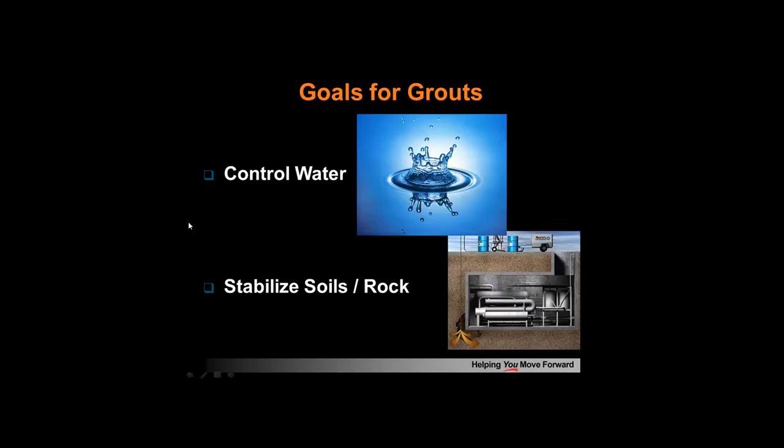Thank you, Don. I'd like to start with talking about what the goals are for grouting, and they basically fall into two particular arenas. One is to control the inflow of groundwater, and the second is to stabilize soils and rock. And how we do that is through the use of various types of grouts.

There's three predominant types that fall within that category. The first are particulate grouts, or what we all know as cement grouts. Within that family, we have ordinary Portland cement and ultrafine cement, which is a cementitious type grout. Then we fall into the solution grouts family, or better known as the chemical grouts, with urethanes as well as acrylics and silicates. And bitumen is a hot tar type grout that's used for stopping large inflows.

Definitely worth mentioning, it's a case-by-case basis and very specific use in those situations. I'm predominantly going to talk about, though, the particulate grouts and the solution grouts in this portion of the presentation.

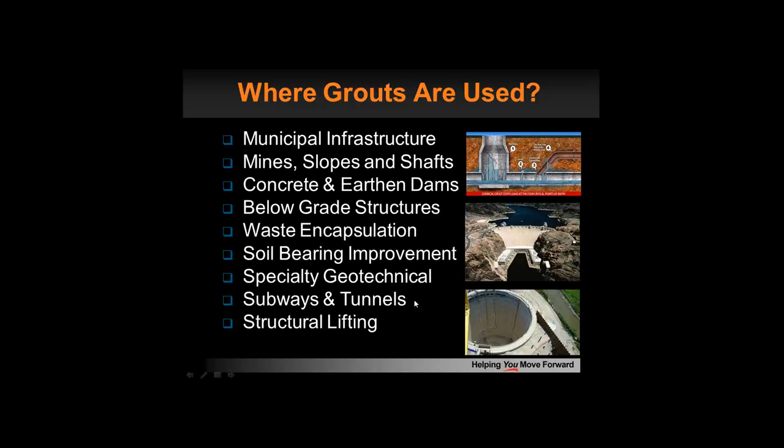Where are grouts used? Well, municipal infrastructure is definitely a strong application for grouts, as well as all these listed here: mines, slopes and shafts, concrete and earthen dams, below-grade structures, waste encapsulation, soil-bearing improvement, specialty geotech, subways and tunnels, and structural lifting. I'd like to begin talking about the cementitious grouts mentioned just a second ago.

What are the differences between a Portland cement and that of a cementitious grout or an ultrafine or a microfine? Portland cement, on average, has 15 to 20 micron size particulates within that mix or grout, whereas in the cementitious grouts, a microfine has an average of 8 micron particulates, and the particulates in the ultrafine is an average of 3 microns.

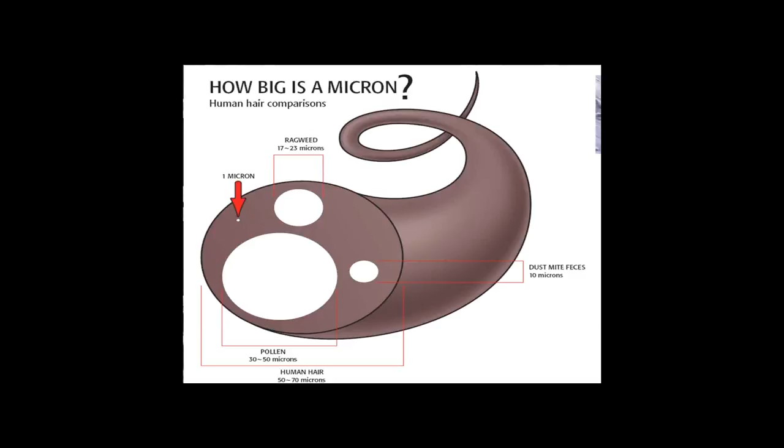What makes up a cementitious grout? It's two components: Portland cement and a pozzolan. There are additional additives for each particular mix design. Super plasticizer, or water reducer, is another common addition used to help with fluidity. But the pozzolans play a key role, and there are two predominant types used.

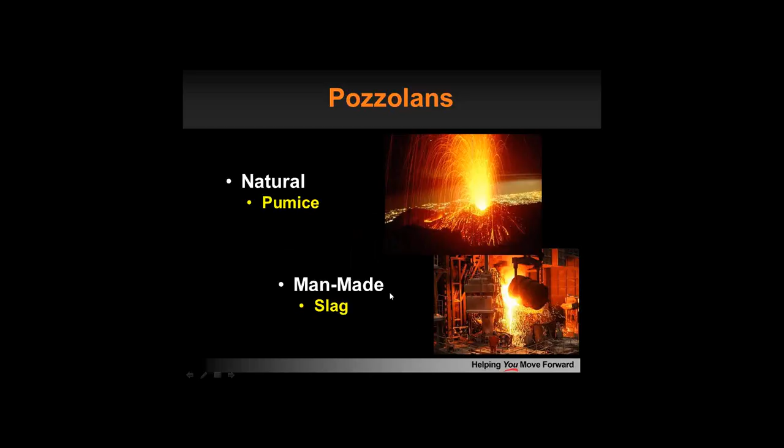There's a naturally occurring pozzolan called pumice, which is used in a lot of ultrafine cements, and there's also a man-made pozzolan called slag. Slag is a byproduct of the steel process, while pumice is a byproduct of volcanic activity. Pumice is definitely a long-lasting pozzolan.

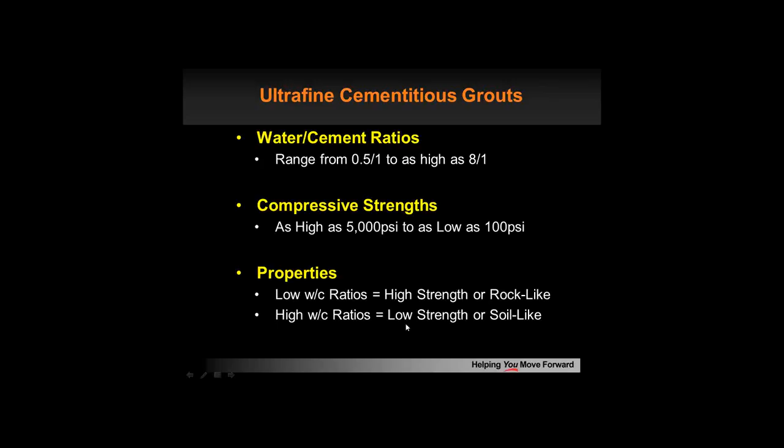Some of the value adds for ultrafine cements: you have a variety of water-cement ratios, from as low as 0.5 to 1, up to as high as 8 to 1 in some parts of the country. Compressive strengths can range as high as 5,000 psi to as low as 100 psi. A low water-cement ratio gives a high strength or rock-like finished grout, whereas a high water-cement ratio gives a low strength or soil-like grout.

Moving on to the types of chemical grouts, two predominant families used throughout the industry are polyurethane and chemically activated grouts. Within the polyurethane family, we have hydrophilic foams and hydrophobic foams.

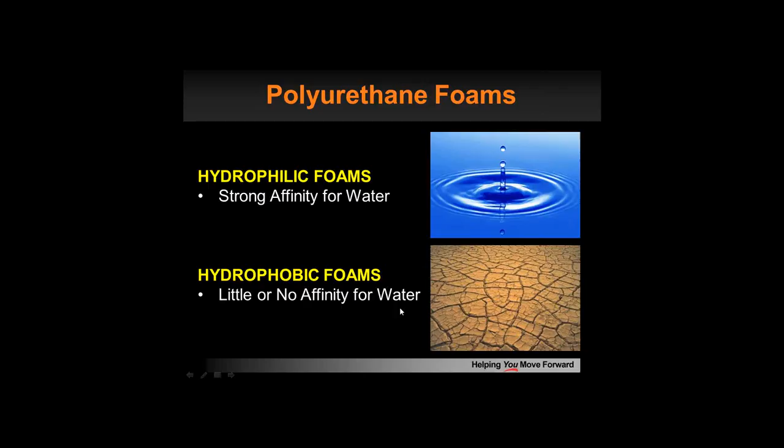The hydrophilic foams have a strong affinity for water — they like to be in a water environment. Whereas the hydrophobic foams have little or no affinity to water, and they can withstand the wet-dry cycles that may occur on projects.

Typical urethane foams have a wide range of viscosities, as low as 50 centipoise to as high as 3,000 centipoise. Reaction times can vary from a few seconds up to 30 to 45 seconds, and sometimes a couple of minutes. They can also be sensitive to temperature.

They have a wide range of varying expansion rates depending on the product you might use, as low as 400% and as high as 2,000%.

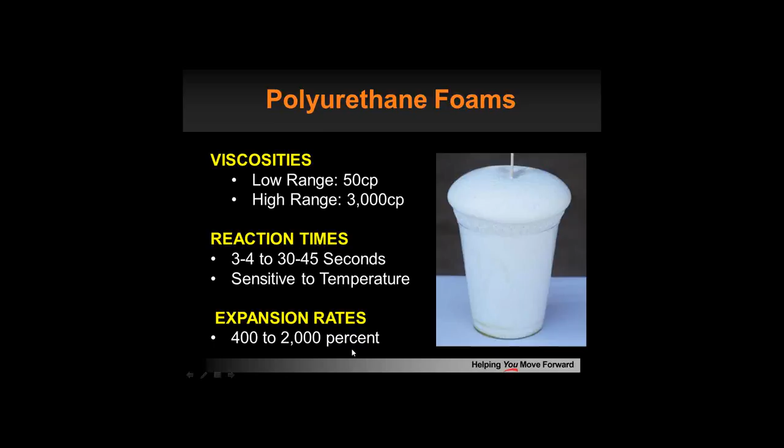Some of the value adds of polyurethane foams: single and dual component options, cures that can be accelerated, varying expansion rates of 400 to 2,000%. A lot are very chemically resistant, and there are several options in the marketplace for potable water certified products.

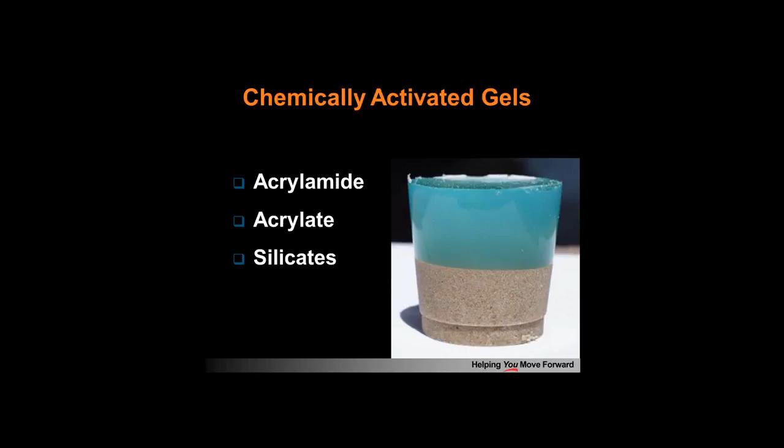Moving on to chemically activated gels. Within that family are acrylamides, acrylates, and silicates. Chemically activated gels are water-based, making them hydrophilic — they like water in nature. They often have ultra-low viscosities with the ability to penetrate very fine cracks in soils.

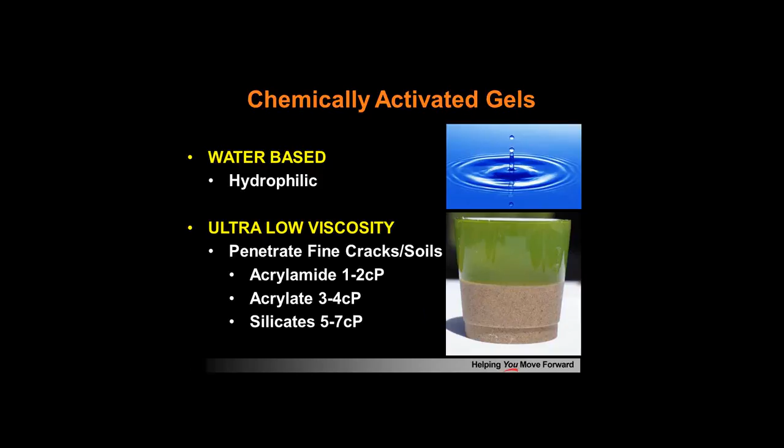Acrylamide has a viscosity of 1 to 2 centipoise, acrylates is 3 to 4 centipoise, and silicates is 5 to 7 centipoise.

Some of the value adds for chemically activated gels: lifespan — acrylamide up to 362 years, acrylates 54 years, and silicates considered a temporary solution on most applications at 1 to 2 years. Chemically activated gels are chemically resistant and have controllable set times, with acrylamides and acrylates ranging from a few seconds up to 10 hours, and sodium silicates about an hour.

There are root control additives used in the municipal industry that can give you 2 to 3 years of inhibition. Now moving on to municipal grouting.

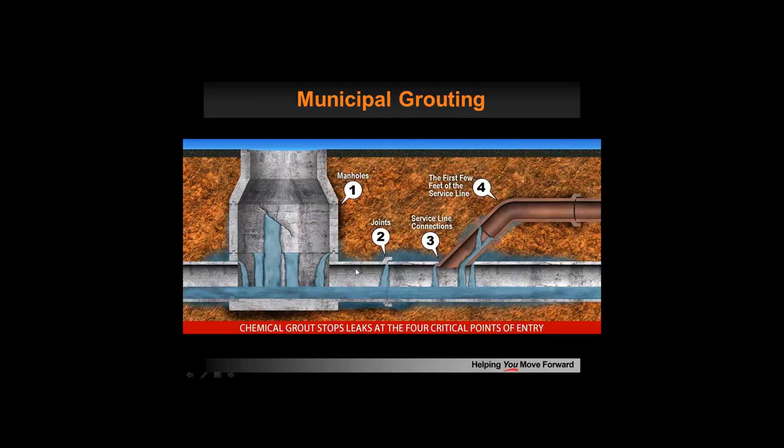Municipal grouting is a key solution in controlling infiltration in the different infrastructure of a sanitary sewer system within a municipality. That sanitary sewer system will consist of a main line, laterals, and manholes. Each of these — whether joints or cracks in the main line, the connection points between the main line and lateral, or the same joints and cracks in manholes — can serve as potential infiltration points. So how do we solve this with grouting?

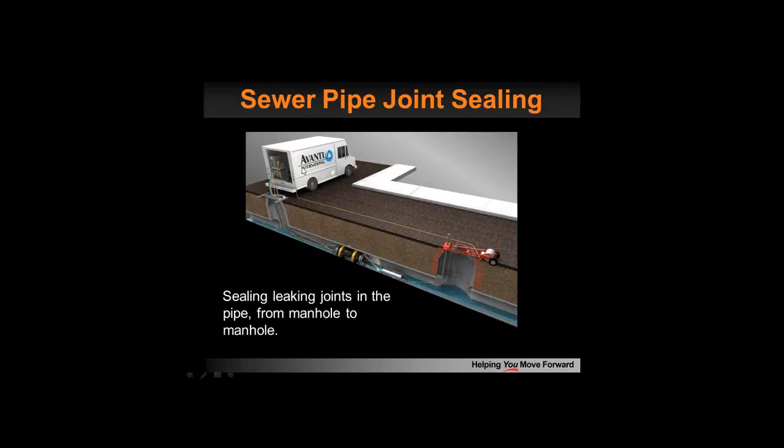Sewer pipe joint sealing or grouting can be done with a truck and a packer. They'll straddle that joint and pump grout in and around it, creating a bulb outside of the joint. Here's an example of an excavated grout ring that was injected around a sanitary sewer pipe.

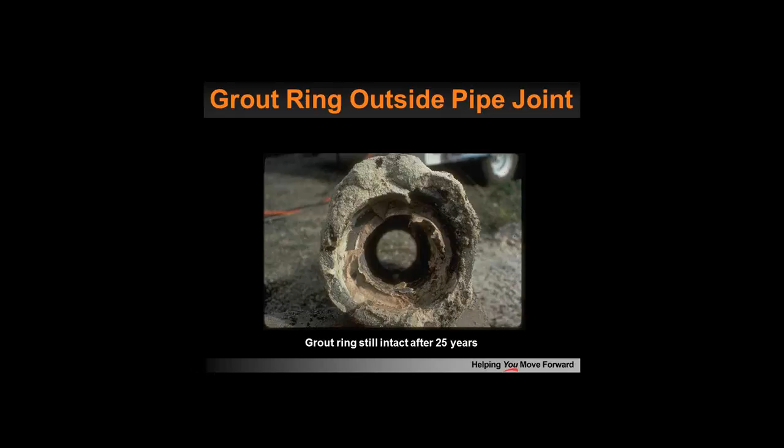So it creates a soil gel matrix, which is watertight. Again, pipeliners don't stop infiltration. That's another point of potential inflow or infiltration of the sanitary sewer mains.

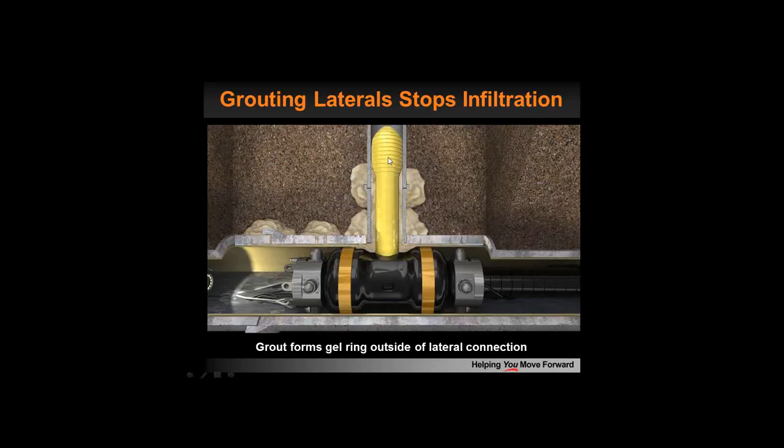Again, that solution is grouting. They'll have a packer with a bladder that can stand up into that lateral, and then the ability to inject a grout into all of those inflow or infiltration points. Manholes, again, curtain grouting of manholes are key, or crack injection for controlling water inflows and infiltration.

Frequently done with chemical grouts. In this particular situation, urethanes oftentimes are used, whereas in sanitary sewer mains and laterals, acrylics are used most often.

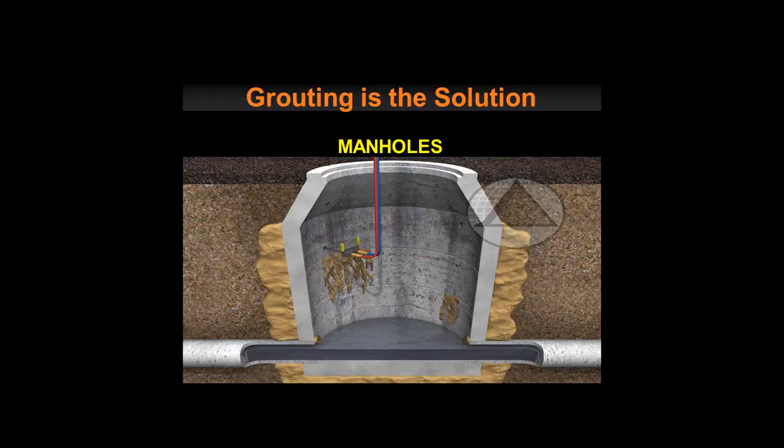Grouting is truly a cost-effective solution. Quick example of pipe rehabilitation on 8-inch pipe. Pipe grouting runs roughly $6 to $9 per lineal foot in cost, whereas pipe lining of that equivalent diameter can be as high as $25 to $35 per foot.

Lateral rehabilitation connection grouting could be as high as $300 to $350 per connection, but that's minimal in comparison to what it would cost to replace that connection or do other means of repair or rehabilitation, ranging as high as $1,500 to $7,000 each.

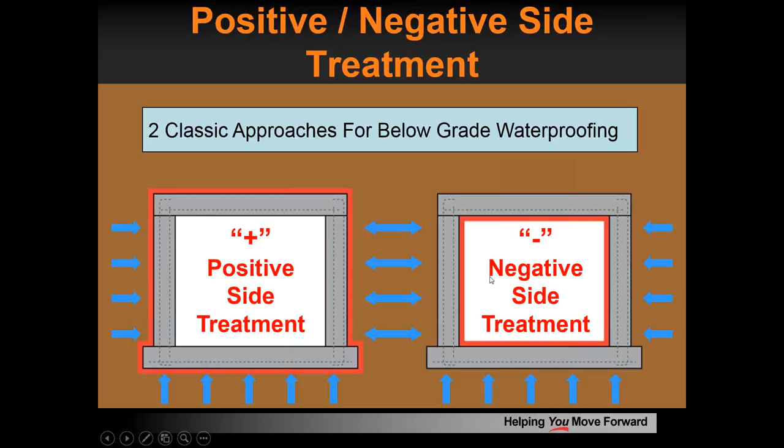On the other side of the screen, on the right-hand side, a typical solution when a structure may have had a positive membrane and has started to leak, or sometimes even in new construction, we use negative side treatments. Negative side treatment means that the membrane system or treatment is opposite the hydrostatic water. So these are the two classic ways we do water control, positive and negative side treatments.

Now, when we get into negative side systems, there are basically four classic techniques used today. The first one and the most common is injection grouting, seen on the upper left. Then there's a concept called water management, which basically means you allow water to leak into the structure. You put a plastic membrane over the floor and wall, cover that with concrete or steel studs and gypsum, and then you direct that water to a sump and it's pumped back out.

So in some respects you might think, well, that doesn't seem like waterproofing. Well, that's why we call it water management. And many times in water management, the first thing we do is injection grouting before we do the water management technique. Then there's coatings.

Coatings typically are techniques where you put some type of chemically reactive or sometimes elastomeric coating on the inside of the structure to seal out the water. Normally in coatings, we first inject all the active leaking cracks and joints.

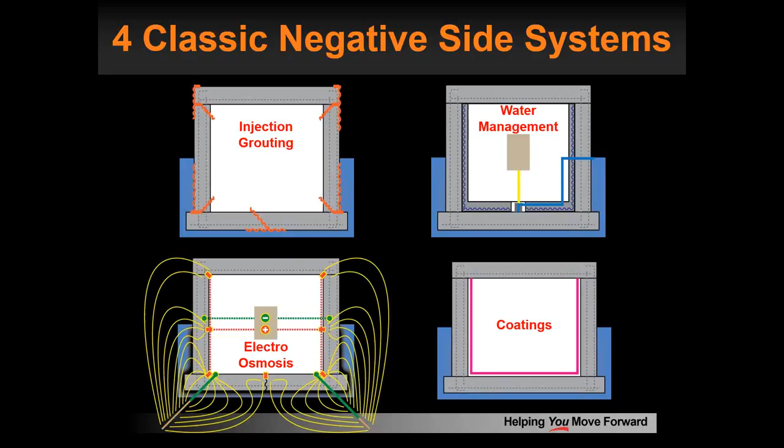The last technique used on occasion is called electroosmosis. This is basically an electrical solution, whereas what we do, shown in red here, is put small anodes in the cracks and joints on the inside face of the concrete, and then we put cathodes, rods that are drilled through the floor or wall out into the soil about 10 feet, and connect those to a power supply. So we have this power supply providing positive charge on the inside of the concrete, negative charge out in the soil, and we create a very low-level electric field, moving particles from the anode to the cathode, and in thus doing, we dry the concrete out.

Crack injection is probably at the next level, a fairly low-cost investment. Performance sometimes can be a little irregular depending on how tight the cracks are and how old the concrete is. And then we have interior coatings, usually a little higher performance, but typically with interior coatings, you first have to do crack injection, and that's why it tends to be a bit more expensive.

Then there's drainage. Typically, first we do crack injection of all the leaking cracks and joints, and then we put in plastic membranes, a sump system, and cover up that drainage media. And then there's electroosmotic pulse technology, which is a bit more expensive.

Of course, the final solution is exterior membranes, which requires digging up the structure and re-waterproofing it. That's actually always one of the best solutions if it's readily accessible. Many times, though, the outside membrane is not accessible, and we have to do crack filling, crack injection, interior coatings, drainage, or electroosmotic pulse technology.

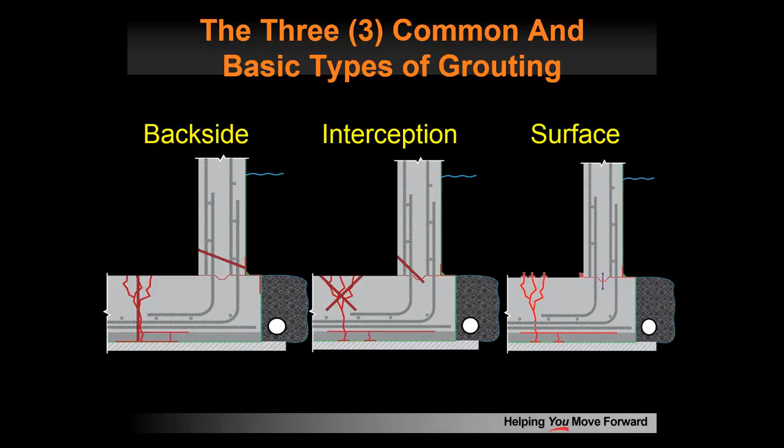Now we're going to focus on the injection techniques today since we only have a few minutes. There are basically three different types of injection: surface-mounted injection, backside grouting where you drill through the floor and wall, and the most common one, interception grouting, where you intercept the wall or wall-floor joint at about the center third, or intercept cracks and leakage in the floor at the center third of the slab. We're going to talk briefly about all three.

One thing you need to understand is that when you inject grout into a crack or joint in concrete to make it monolithic, many times these cracked sidewalls are contaminated with clays, silts, carbonates, and a whole variety of materials. So if you have a structure that's been leaking for a long time, the cracked sidewalls may be contaminated, and anything you inject there is really not going to bond that well. It'll give you some fairly immediate surface sealing, but with time, if the cracked sidewalls are contaminated, it's not going to be a 100% solution.

Another thing that's very important, which we'll talk about a little later, is the pH of the liquid in the crack. There are many types of grouts that are not very resistant to super high pH environments, such as urethane technologies. In conditions with very high pH environments, typically we're looking at acrylamides and acrylates. Sometimes corrosion of steel byproducts are in the crack, which can be difficult, and sometimes there are shadows—little voids that run behind or under the steel—where water can migrate as well.

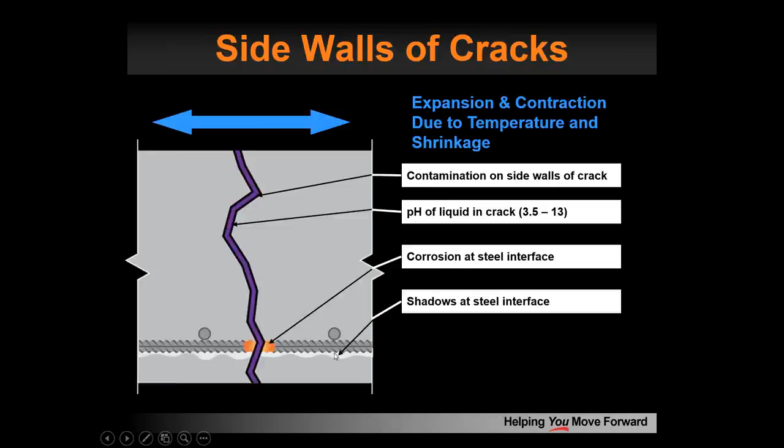So let's look at surface-mounted injection. Typically it's a low-pressure technique where we put ports on the surface and use epoxy or a two-part urethane, pushing that grout back through the crack to try and make the concrete monolithic.

Here's an example of that. This is an industrial wastewater treatment tank where we did surface-mounted ports, then pumped a two-part urethane injection grout into all of the cracks to create a seal.

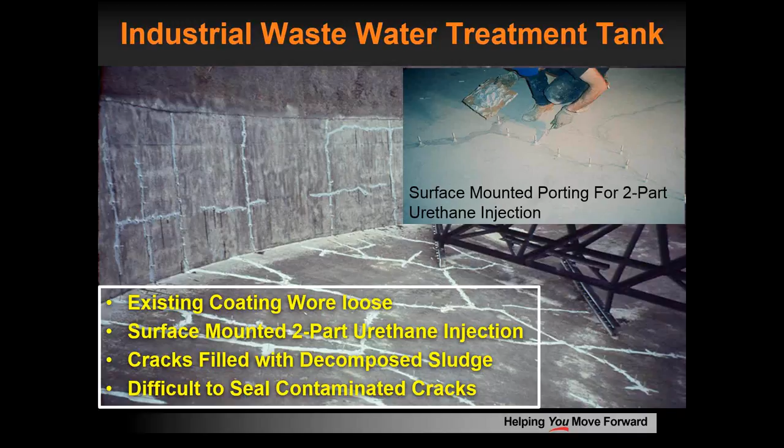At the bottom there, I note it's difficult to seal contaminated cracks. Many times in these wastewater tanks, there's a lot of sludge and debris in the cracks, so you don't always get 100% seals. Normally, if you can get 90% or better, you're doing pretty good.

Interception grouting is probably the most common technique, where you drill into the center third of the wall or the center third of the floor. Typically, we're injecting under pressures of about 100 to 3,000 psi. Normally we don't like to inject grout into concrete over about 400 or 500 psi, because you're exceeding the tensile strength of the concrete. That means using grouts with very low viscosities, as Britt talked about, is very important.

In interception grouting, we typically inject hydrophilic urethanes, hydrophobic urethanes, acrylamides, polyacrylates, and occasionally microfine cement. Essentially, we're intercepting the center third of the concrete, grouting the entire crack or joint, and trying to make that concrete monolithic again.

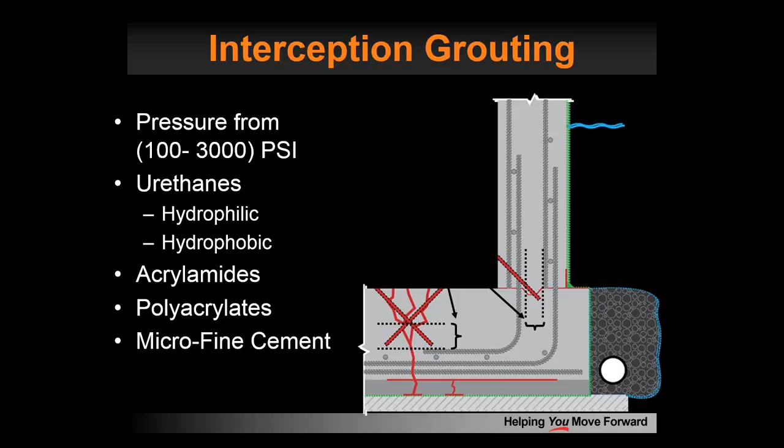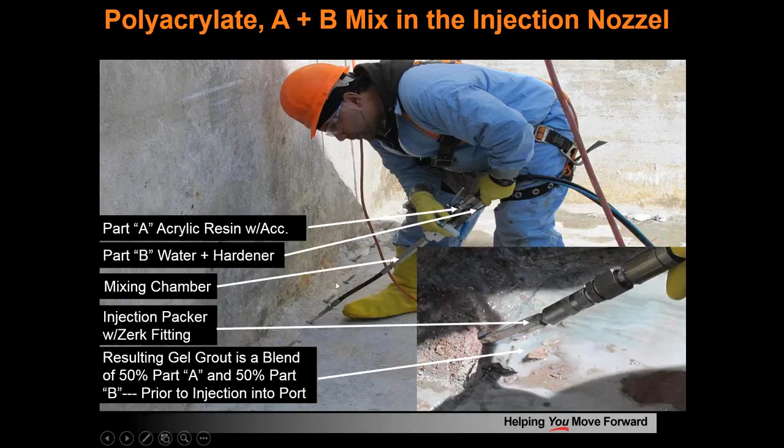So this is actually a two-component grout. If you look closely, you'll see a blue line and a black line, hoses going to the mixing head. We have an acrylic resin with accelerator as part A, and water with a hardener as part B. These are pumped 50-50, mixed in this mixing nozzle, and then shot into the joint.

The next example I want to show uses acrylamide, in a meat production facility. The architect designed this with the processing area on the upper level and storage of products on the lower level. One of the things that was done is they value-engineered the waterproofing membrane out of this intermediate floor when they built the structure.

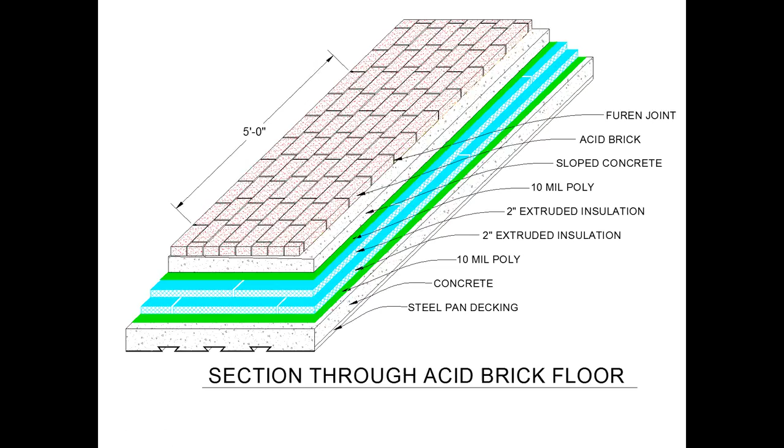Of course, water was leaking from the process area down onto finished goods. The FDA inspector shut down the facility and told them they had to correct this. They looked at removing the acid brick floor and the entire composite, which was about $126 a square foot, and it was going to shut the facility down for several months.

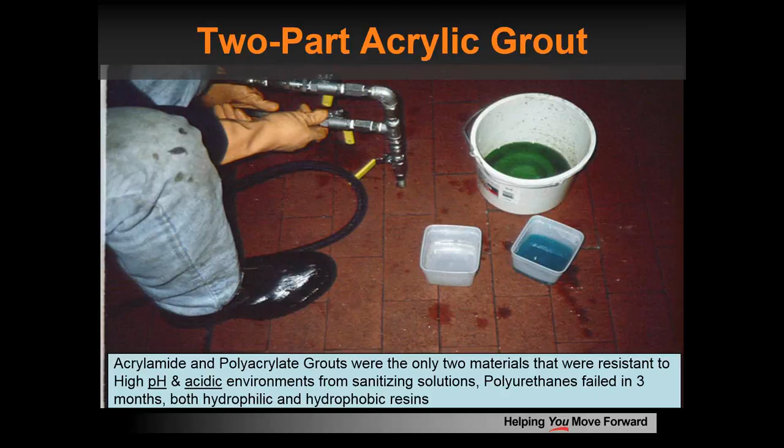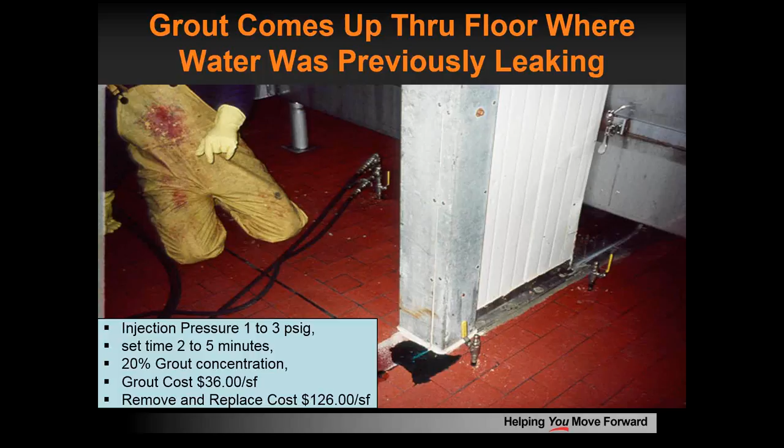Here you can see we pumped at about 1 to 3 psi, with set times of 2 to 5 minutes, a 20% grout concentration, and this grouting cost about $36 a square foot. To remove and replace the floor and structure would have cost $126 a square foot. So it was a very cost-effective solution.

They looked at tearing this entire thing apart and redoing it. We decided to use hydrophobic grout at 20 parts urethane to 1 part water, a twin stream application, and basically used a rigid foam grout to seal all the void space within the structure.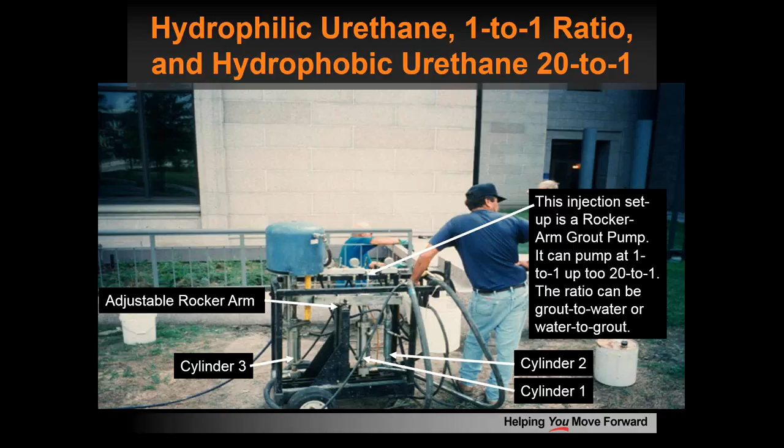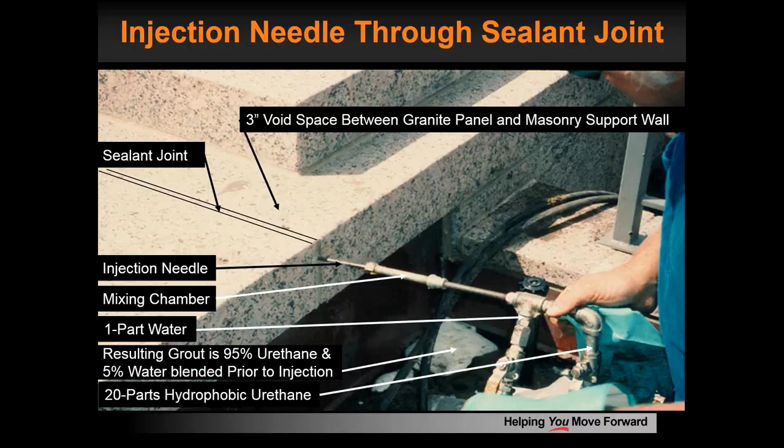Here's a better example of how we put a stainless steel needle on the end of our grout line. We have a mixing chamber, with water coming in as 1 part and 20 parts urethane, giving us a matrix that's about 95% urethane, 5% water, mixing before they actually get into the structure. That way we have good mixing capability of the urethane with water. So that's another good example of injection grouting.

Now I'm going to talk briefly about backside grouting. This is where you typically drill completely through the structure and pump grout curtains, if you will, behind the wall or behind the slab. Basically we're solidifying the soil and creating a curtain behind the wall or floor.

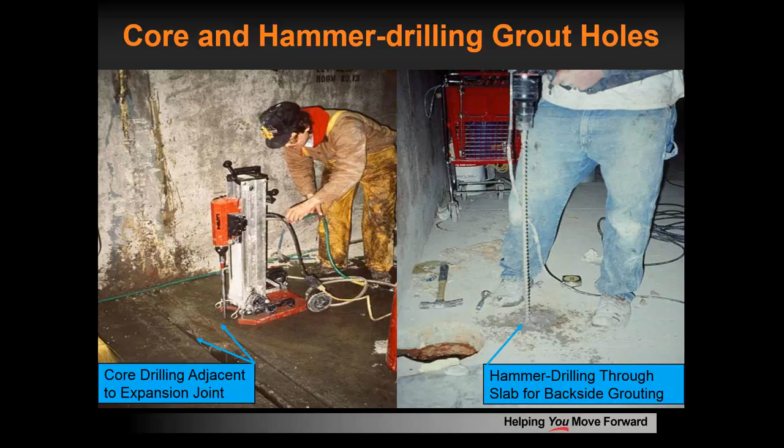Here's an example where we're core drilling right next to an expansion joint, creating a grout curtain underneath this expansion joint to form a seal. On the right, we're hammer drilling through the slab, doing grout curtains at about a 4-foot grid underneath this entire slab, using a hydrophilic urethane at 10 parts water to 1 part urethane.

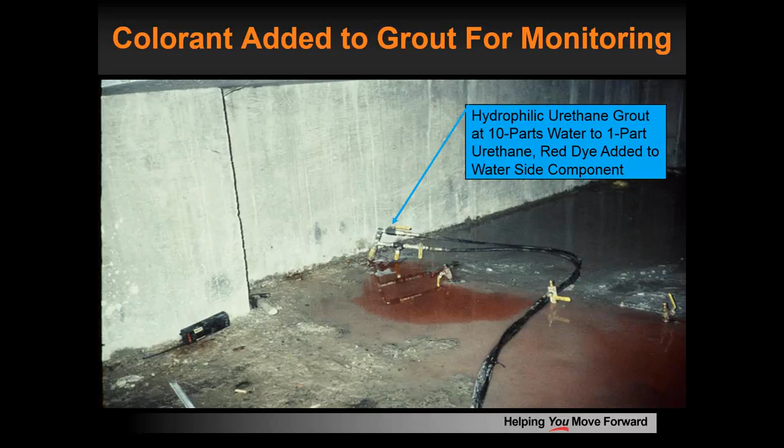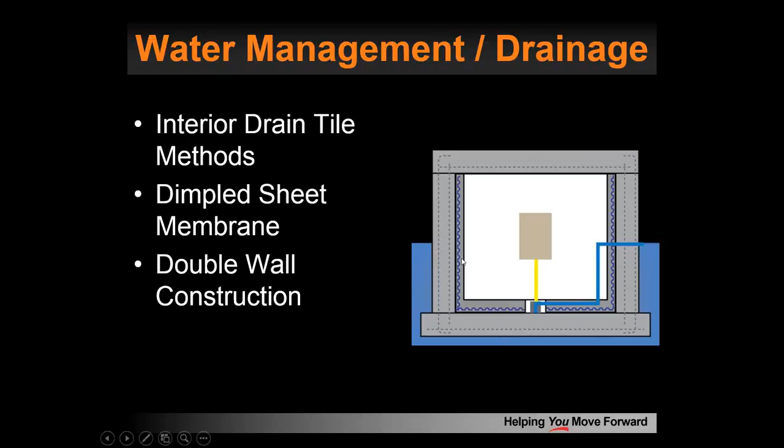So this is a very cost-effective technique for doing curtain grouting. And then in closing this segment, interior coatings and penetrants are often used, but typically we need to grout the cracks first. Occasionally we do water management and drainage techniques, which I briefly described: we put a plastic dimpled membrane on the wall or floor, pour concrete over it, or build steel studs and gypsum sheathing. We collect that water at a sump, and then it's pumped back out.

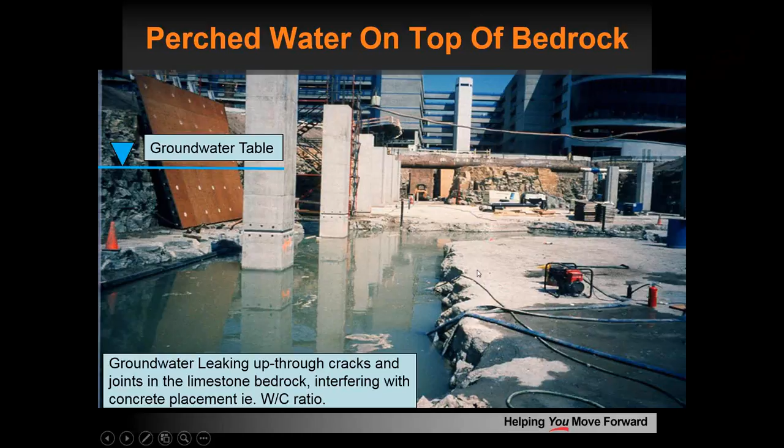Here's an example of a project where we started out, and you can see the groundwater table. This is a tunnel, a people mover tunnel in Minneapolis, Minnesota, where groundwater was leaking up through the rocks and interfering with the water-cement ratio when they were trying to place concrete. So we put together a proposal to grout all the cracks in the rock, and that was about $18.50 a square foot. Ultimately, on phase 1 of this project, what we did was the grouting.

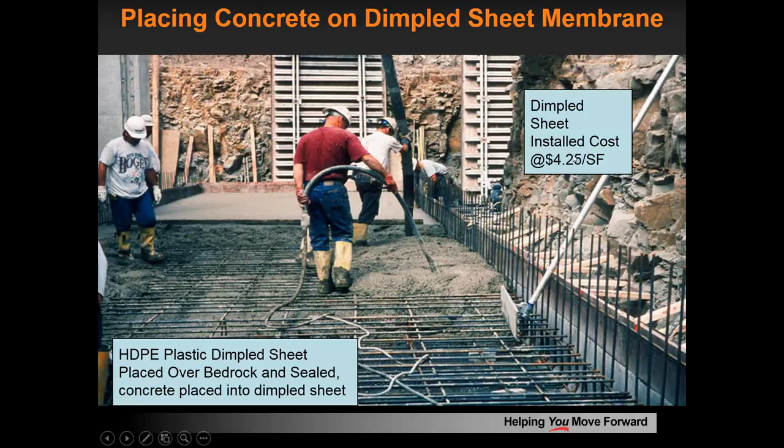On phase 2, they asked, hey, are there some other things you could consider? So on phase 2, we did a water management technique where we actually put a very strong dimpled sheet over the rock, then did our steel, concrete, and formwork on top, and that cost about $4.25. So there was a case where a sheet membrane was more cost effective than grouting.

And then the last technique I mentioned is electro-osmotic pulse technology. I briefly described this earlier—it's an electric solution that uses very low energy, but it's a way to dry concrete out.

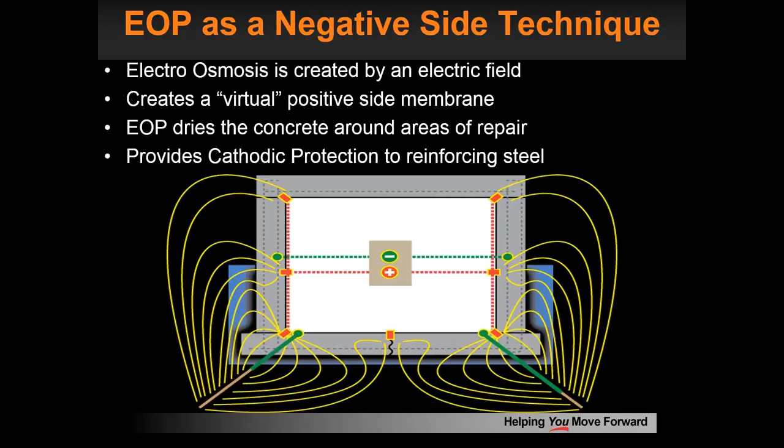Okay, thanks, Don. Our geotechnical presentation is going to be a little bit different than the previous two. They had some nice pictures where they knew exactly what they were grouting into. Geotechnical is different—the ground is not an engineered material, so we have a different consideration, and our first consideration is always the ground.

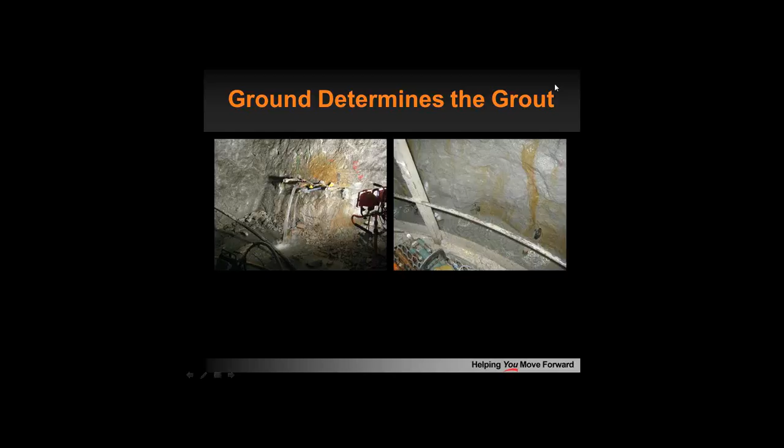So obviously, we want to know whatever we can about the ground to get a handle on things first, and we'll probably know the rock type. If we're really lucky, we get some test values for lugeon, the hydraulic conductivity of the rock—how good they are, sometimes questionable—but we try to use those to come up with a way to determine what grout we should use.

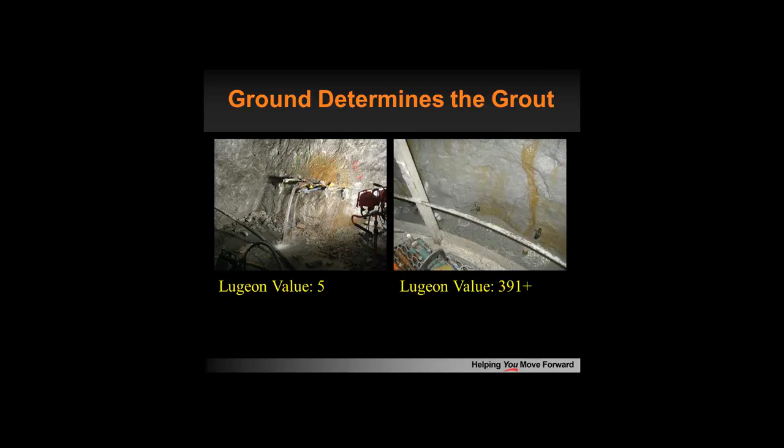The picture on the left here could be tough ground, but actually we ended up grouting it off successfully with the top one or two grouts. The picture on the right, we should have been able to put any grout we wanted into that ground, but it kind of lied to us a little bit, and we had to ultimately go with acrylamide to get the ground to take any grout.

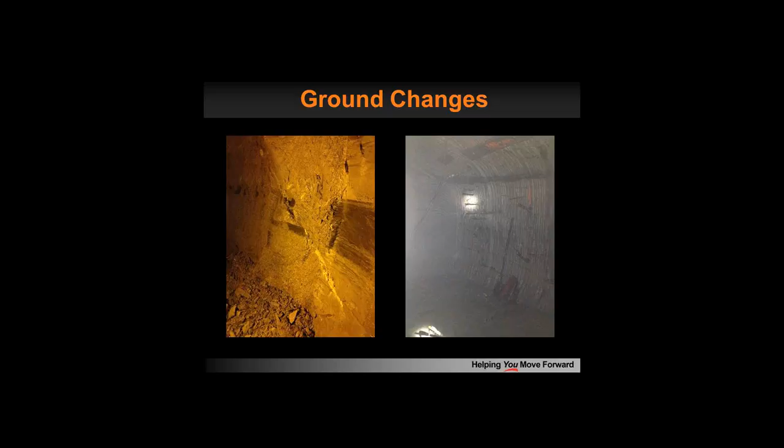Another aspect you've got to remember when dealing with the ground is that it changes. These two pictures are for the same project. The picture on the left is at a depth of about 380 feet below ground—ultrafine cement grouted that off just fine. The picture on the right is 40 feet deeper; however, it would not accept ultrafine, so we had to switch to acrylamide to get the ground to take anything.

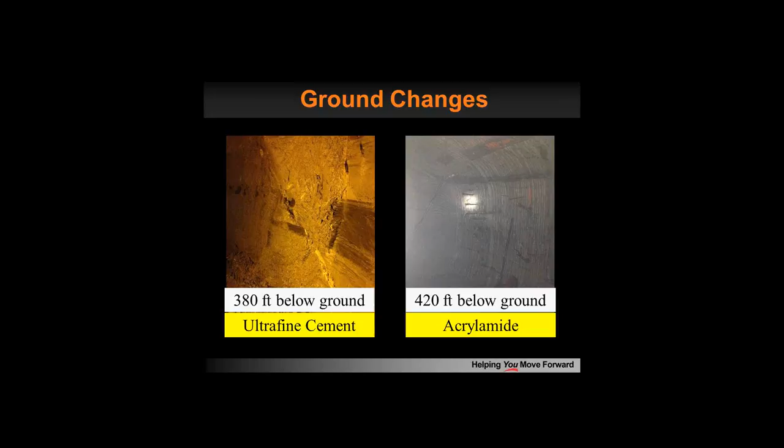And finally, probably one of the most important things with geotech is that you've got to expect the unexpected. A good geotech investigation should give us a warm, fuzzy feeling that we can classify and predict probably 95% of what's in the ground. But we have to remember that means there's 5% we're probably never going to know. A lot of times that 5% is what we have to deal with as far as changes go.

So my argument would be that the first value we can offer as geotechnical practitioners is a thorough understanding of the ground and realizing what the ground can be. The rest of the presentation will define some other things we can add, and ultimately, what we want to do with a value engineering project is have a successful project.

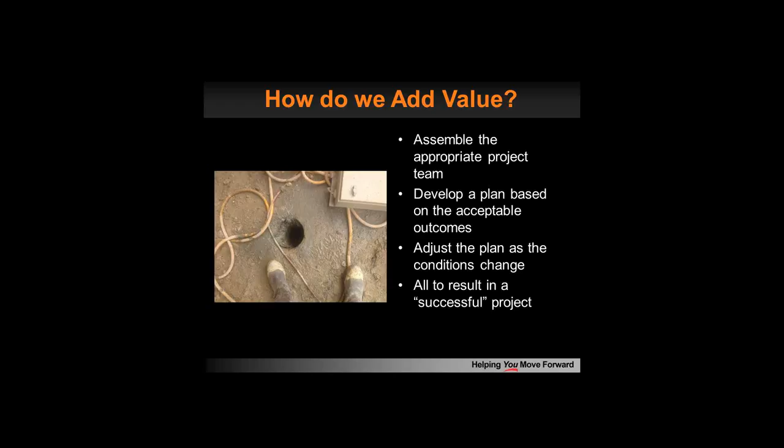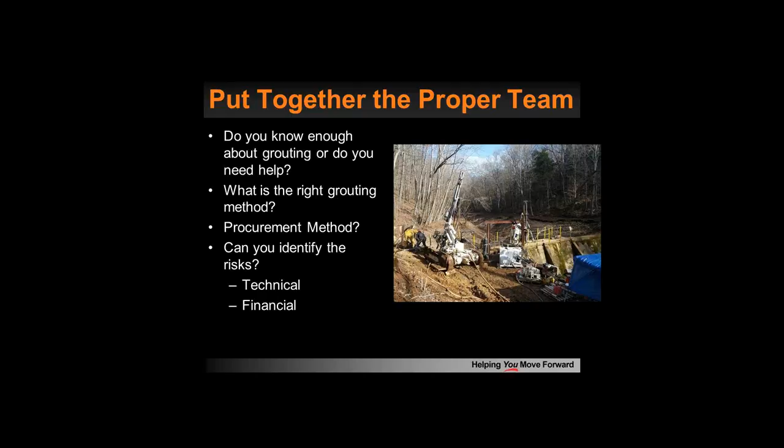So we talked about a successful project. I think it's really important to define what a successful project is. The first thing I want to do whenever I get a call or walk onto a grouting project is ask, why are we grouting? Sometimes the answer may surprise you, and sometimes you may have to say grouting's not the right solution, or it won't get you to the goal you want. Helping somebody find the right solution, whether it's grouting or not, adds as much value as anything, even if it's not adding revenue to your bottom line.

The next thing is, if you're going to grout, you need to define an acceptable range of results that achieves that goal. Define what the results should be, and then determine if we have a range that will get us to our ultimate goal. Going on from that, I define this as grouting wants versus grouting needs.

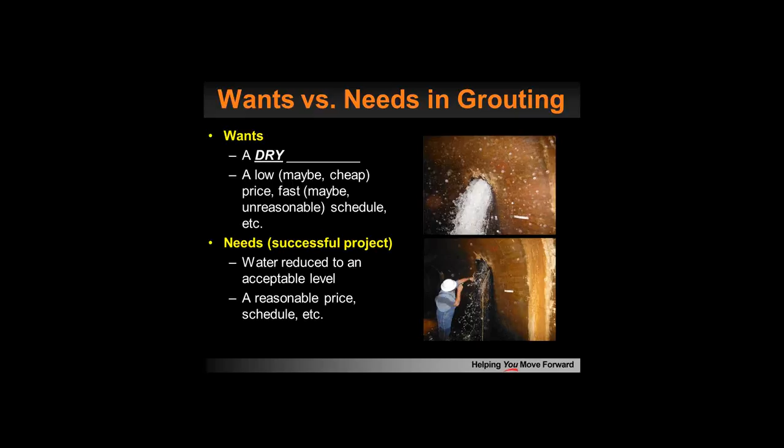If I talk to someone who hasn't done a lot of grouting, when I ask what they want to achieve with their grouting program, they'll say a dry tunnel, mine, shaft, whatever it is. But that's not necessarily what they need. What they really need is to reduce the water to an acceptable level to achieve their goal, done at a reasonable price or schedule, or whatever their main motivation is.

This graph is theoretical. I put it together - it's not based on real numbers, but the point is to demonstrate the effort required to achieve a certain amount of water cutoff in geotechnical grouting. This is a very important concept to understand. The graph may move around, the blue line may change, but ultimately you can see that you can achieve fairly good results on most projects with a reasonable amount of effort. But as you move toward 100% water cutoff, or dry, your effort increases exponentially for what you're going to cut off.

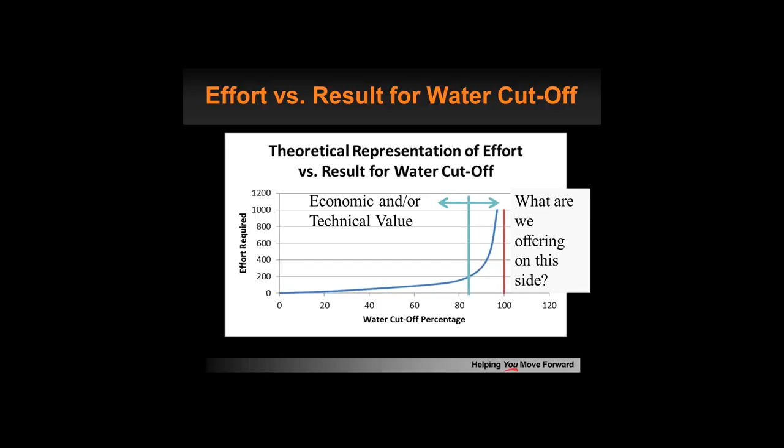Another value we can add is understanding that on most projects we should be working on this side of the graph. Now, I'm not saying there aren't projects where we work on the right side of the graph. However, the important thing is, if we are working on the right side, understanding why we're doing it and being able to convey the implications to our client.

Finally, so we've gone through the process and put together a plan, we should be prepared to change that plan. I'm not going to read this upper portion, but look at the second paragraph - this is the actual terminology included in every work plan we submit. I think that's a really important aspect of geotechnical grouting: you come up with the best plan that you can, but your contract and procurement process needs to be set up to change that to address the conditions you actually encounter.

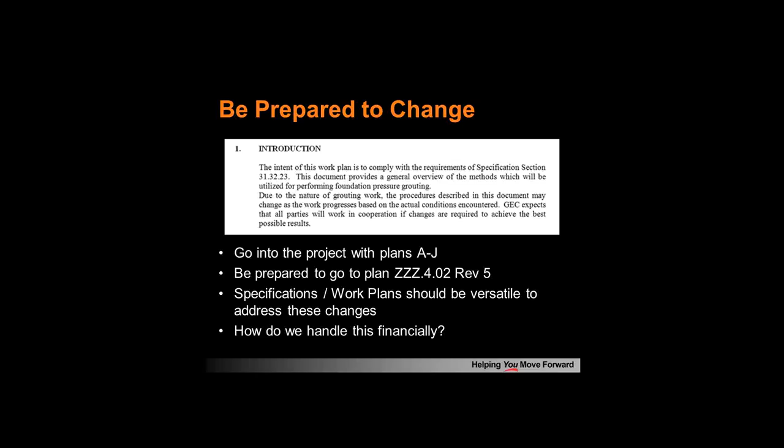So in summary, geology - we need to be able to interpret it to the best of our ability, and it's going to dictate.

If you're looking at buying a grouting project, understand if you can determine who your team should be or if you should bring other people on. Define the goal of the grouting, decide what the results will be, if there's an acceptable range of results, and formulate a plan and be ready to adjust it.

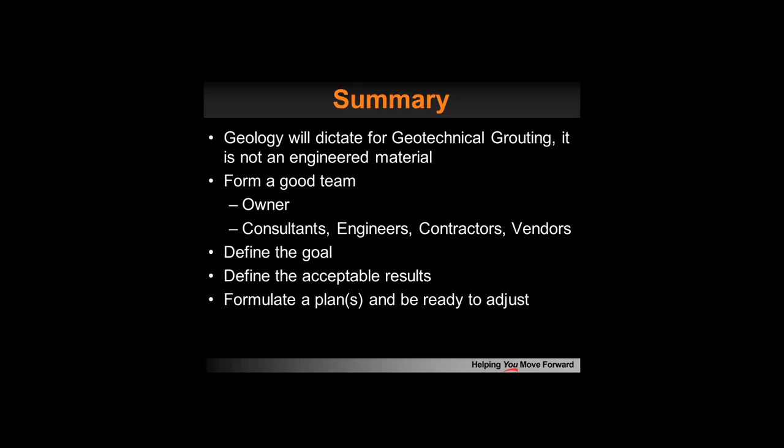And with that, I will go to you, Don. I think I just love the way you think, Brad.

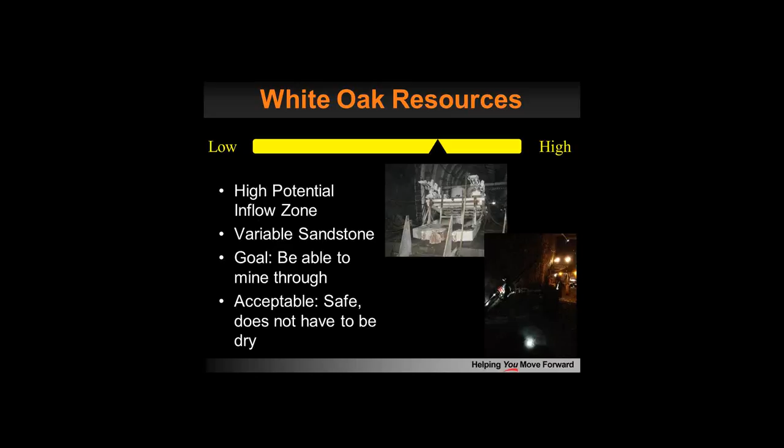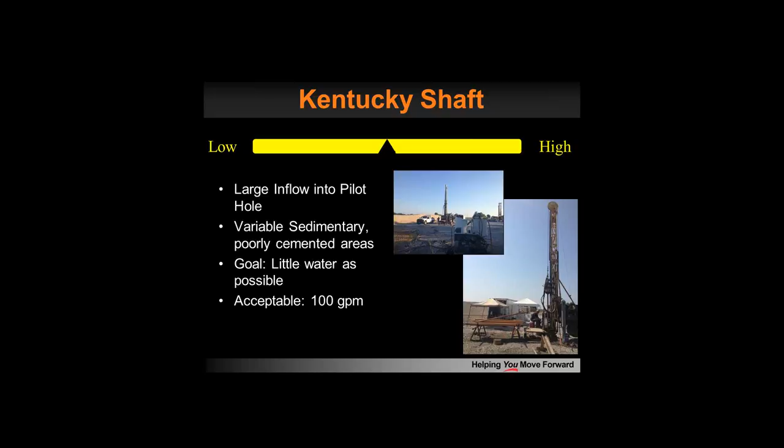Finally, this is a shaft in Kentucky, a raise bore shaft. When they drilled the pilot hole, they had a large inflow into the hole. This typically can be a fairly easy solution if it's isolated, but it's complicated a bit because the pilot hole is already there and you need to save it. They're dealing with one of these sedimentary type formations that requires a fairly significant amount of effort to grout off, so the effort jumps up there. You talk to them about what they'd like to have - as little water as possible, which means a fairly significant amount of effort. However, after really discussing it with them, and they talk to their operations and underground people, they can be set up to accept up to 100 gallons per minute of water coming into the shaft, which really reduces the amount of effort needed.

Perfect. I'm going to move over to Brent. Brent, you gave us some case histories already, but I'd like for you to share a few more. I love how you think as well. Fire away.

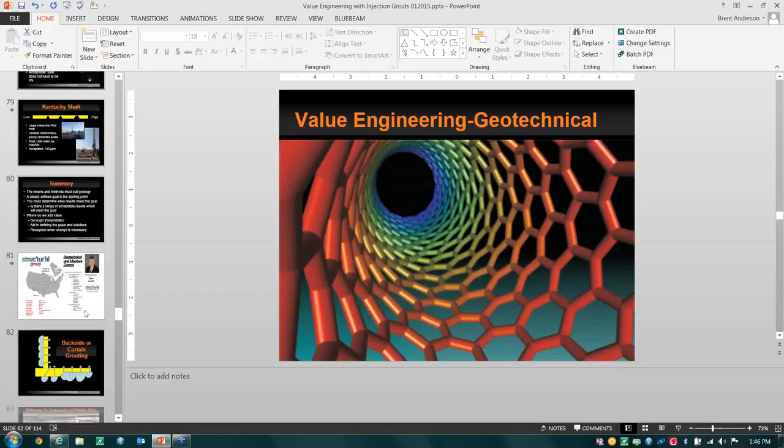All right, thank you very much. I just need to slide down to get that other one. There you go. Yeah, I thought I had this already preset—it sneaks up on you, this doesn't it? You'll enlarge your screen, you're in business. Yep. Whoops. Do we look? There you go.

Okay, as Don had mentioned earlier, one of my jobs is I'm the geotechnical and moisture control consultant for Structural Group. We have 21 branches around the United States. We do construction work for all types of moisture control in infrastructure, commercial, and industrial environments.

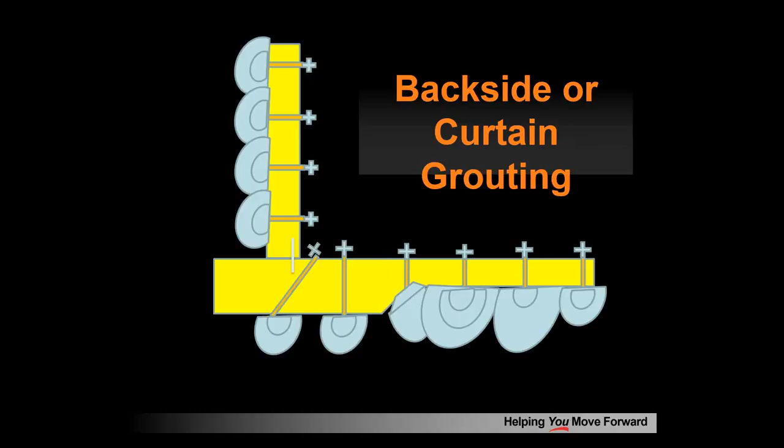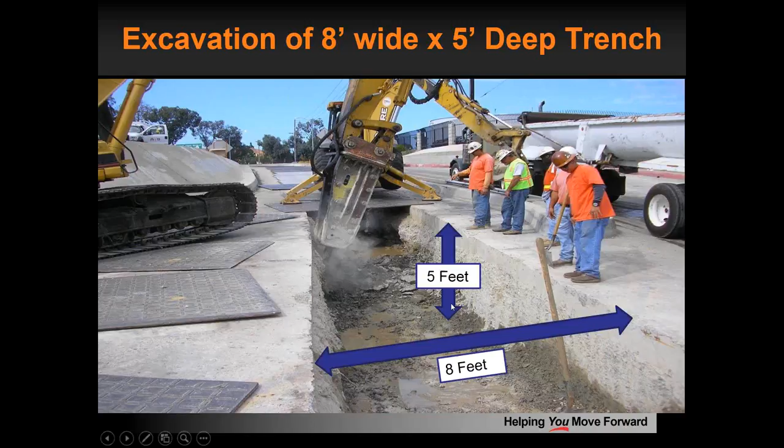The next picture shows a little better example—this is where those high voltage lines are placed in the exit entrance ramp, and you can see water leakage coming up through these joints. There's been a lot of seismic activity and continues to be. That water is collected in these little trenches and runs to a collection point, and then it's actually pumped down into these tanks. We're getting about a gallon per minute, 1,500 gallons per day, and about 45,000 gallons a month of contaminated water that has to be treated.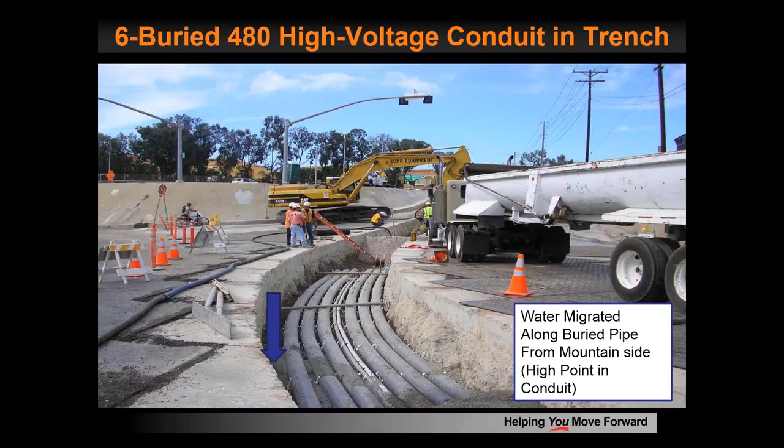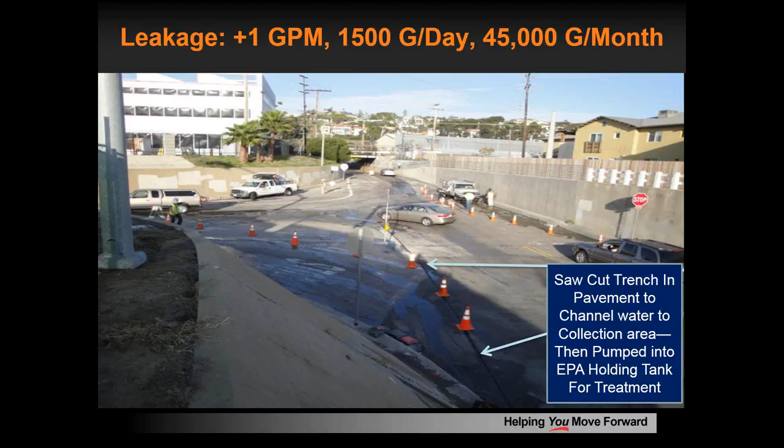The owner hired, over a period of a couple years, 3 different contractors that proposed hydrophobic urethanes. One proposed hydrophilic urethane, and another proposed a 2-part urethane. All of those systems lasted about 3 to 6 months, and then leakage continued—part of it probably because they tried to inject the cracks and seal them rather than doing a curtain. So what we basically proposed, and you can see the evidence of the water here and how it was leaking, we proposed to do backside grouting where we put a curtain, about a 6-inch thick curtain of grout underneath the whole area.

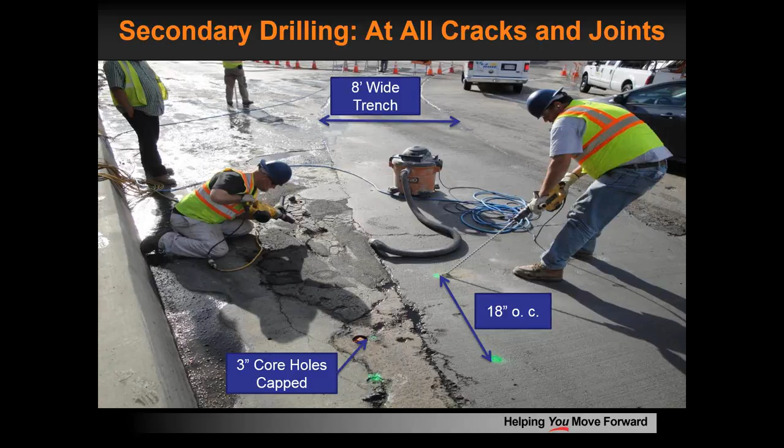So here we are core drilling on the outside of that 8-foot trench, and while we were working, 3 of the 6 lines were always active, so we had to do this work while there was energy going through the system. We're doing a little interception grouting here at the joint, and for these we used a 30% acrylamide solution, a real concentrated solution of acrylamide.

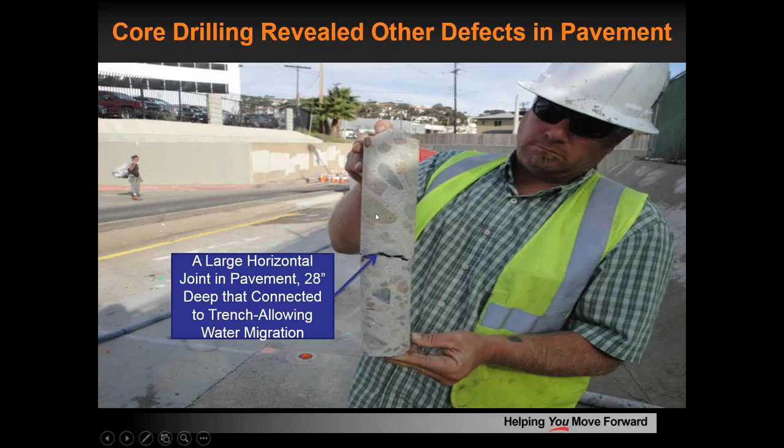Here's a core that we took out of that area where they took 28 inches of concrete off the top and put in a membrane. As I said, that lasted about 5 to 7 years, and then it re-leaked.

Here we are mixing up some of the acrylamide resin. These are the pumps, piston-driven, one-to-one pumps that I use. Many times we'll pump 2 ports at a time, and I got these 2 pumps running in unison.

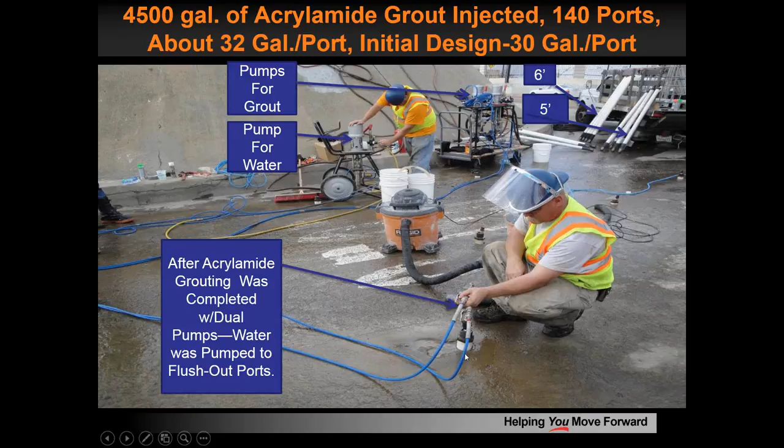Here we're injecting through grout pipes, and you can see in the background some 6-foot grout pipes and some 5-foot grout pipes. These were put down the 3-inch core holes, and basically we injected at the top, and the grout comes out the bottom. This little black area is a rubber gasket that forms a seal when we tighten the top.

Just to give you a little flavor, we did this work December 3rd through the 8th, about 6 days, and we were pumping about 700 gallons per day. This tells you how many ports we used. We actually lost 2 ports because we couldn't get them out of the cores, but all the rest we got out in reuse.

We had pHs - our A side was about 9, our B side was 3.7. Our set times were about 30 to 45 seconds.

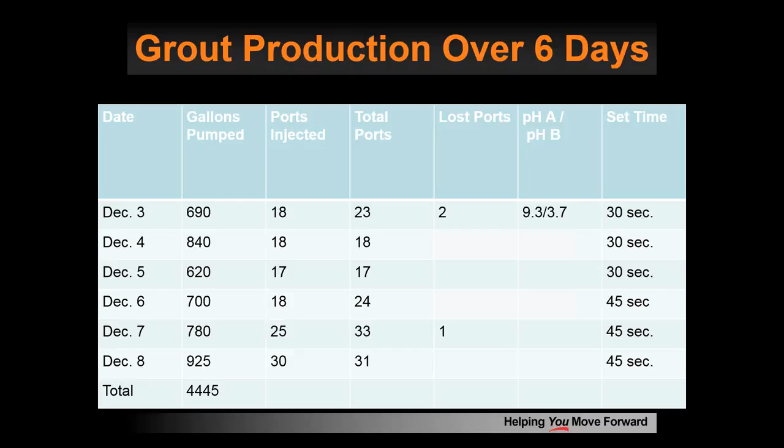At the end, we sealed this area up. It's been through a lot of seismic activity, and it's about 5 years old now and has never leaked again. So the utility company is extremely happy with us doing this backside grouting technique.

Thank you. I think that's a great proof statement for injection grouting. Thank you for that, Britt, I'm making you presenter.

Thank you, Don. Now to move on to some municipal case studies. I have 2 I want to share with the group. The first is the city of Sunrise, Florida. The city of Sunrise, Florida had infiltration issues that they solved through mainline grouting of the sanitary sewer using acrylamide grouts.

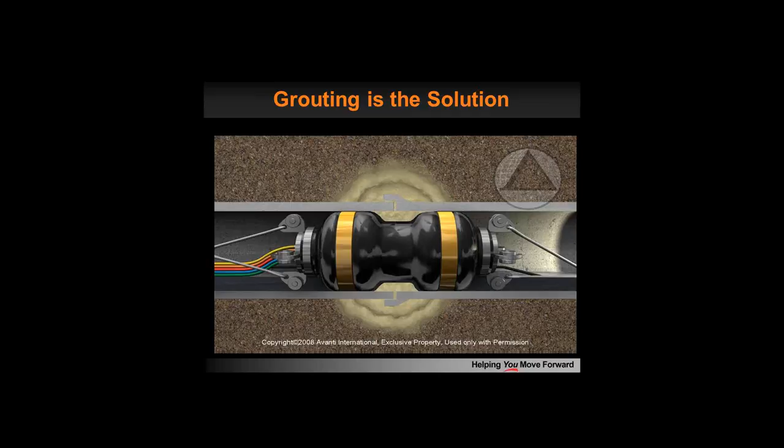I apologize, this project's not in a floodplain, so I want to correct that - that was a mistake on my part. But they were challenged with pretty significant inflows that were very costly to them. The measured inflows the city of Sunrise were experiencing was up to 720,000 gallons per day. They did choose to use acrylamide grout to cure or grout the mainline joints.

They grouted 500 lineal feet of 12-inch sewer. The cost to grout that was approximately $24,000. That grout resulted in a flow rate reduction of 615,000 gallons per day, roughly a savings of $1,328 per day, or just more than $2 per 1,000 gallons. Pretty significant savings based on that one single line of 720,000 gallons per day. To treat that flow would have cost almost $485,000; minus the installation cost, that resulted in roughly $460,000 to $461,000 per year in savings to the municipality just to treat that I&I.

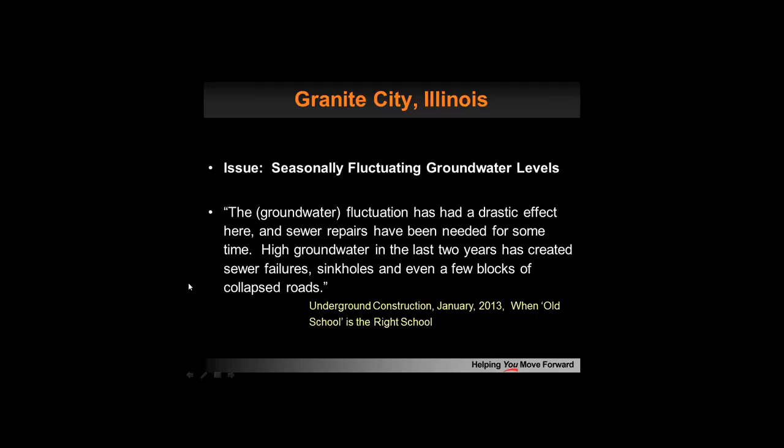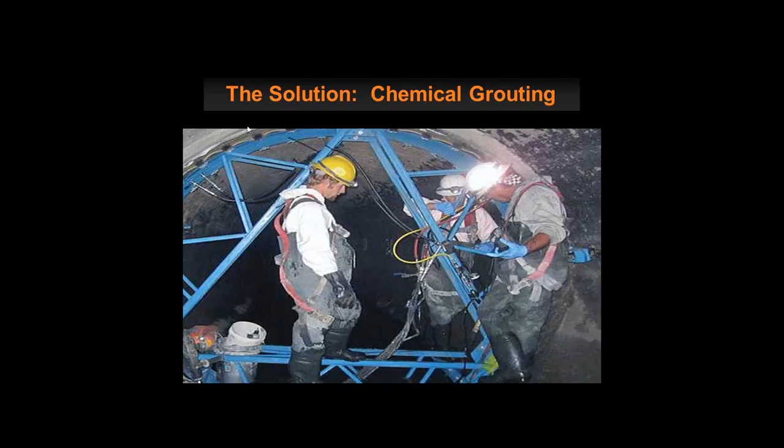So what they did, the solution was to come in and grout those joints and seal off that sewer line from the impact of those fluctuating groundwater and the I&I that was occurring. You can see here in a 108-inch diameter sewer line, this is combined sewer, both storm and sanitary, given that's why the size. Metal frame here to create that seal and to inject that grout.

Summary, it had 3,600 lineal feet of 108-inch diameter combined sewer pipe. They injected approximately 2,100 gallons per joint on a total of 600 total joints. The cost of the large diameter grouting program was about $366,000, or $610 per joint. And keep in mind, that was for 108-inch, or 9 feet in diameter.

What they found and what they believed and experienced was for large diameter pipes that are structurally sound, grouting is just as viable a solution. It's considered more economical. So a great couple of case studies that were very successful in the municipal industry.

Very good, and thank you to all the presenters for sharing. Let me go full screen. Can you see my screen okay? Yes, all right.

Something that Avanti is really particular about is, in the announcements leading up to this event, we itemized 6 takeaways that you would yield from this presentation. And above all else, we want to make sure we deliver on this promise. So we talked about insight on how, when, and why to look beyond standard practices and procedures. We talked about unique cost value benefits, the life cycles of each grout type. Understand how to tailor set times, mix ratios, and additives to satisfy specific needs based on site conditions. Differences between geotechnical, industrial, and municipal specifications.

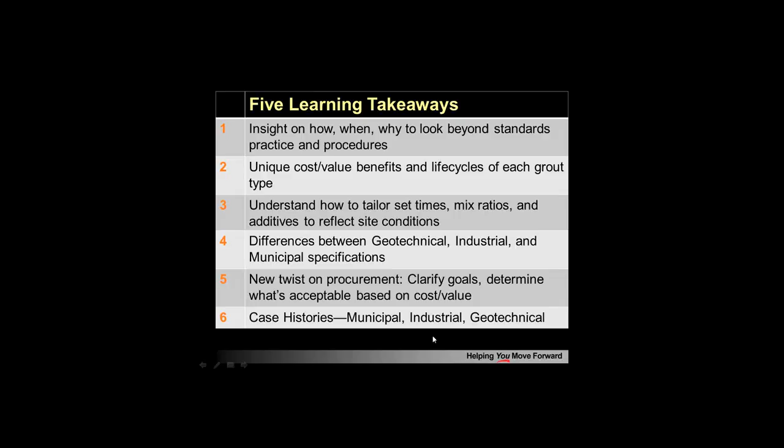Okay, you know, I'm going to assume that the water is leaking through joints in the vault, potentially some cracks, but probably the floor-to-wall joints, some wall joints, and then potentially around the piping that comes through. And the first solution might be some interception grouting. If the cracks are real tight, I would suggest you consider a high solids polyacrylate. If the cracks are larger, a hydrophobic urethane could possibly be a good solution. If the leakage is really problematic beyond that, you probably are going to need to do some curtain wall grouting, in other words, some backside grouting. And there I would consider using an acrylamide or a polyacrylate grout under the floor and behind the walls in all the areas in and around the piping that exists.

Thank you. I'm going to go to another question here, and I've got to make this one brief. What are the advantages and disadvantages to using different types of grout for a given application? And someone who's had a lot of experience with that is Brad. Brad, would you respond to that?

Quickly, I'd say that the advantages are that you're going to get more water cutoff because you're going to ultimately do a better job, because you're going to fill up the bigger cracks or joints as well as the smaller ones. The disadvantage is simply probably going to be cost, because you're going to have more equipment on site to handle the different types of grouts that you're injecting, because you're going to use different equipment for different types of grouts.